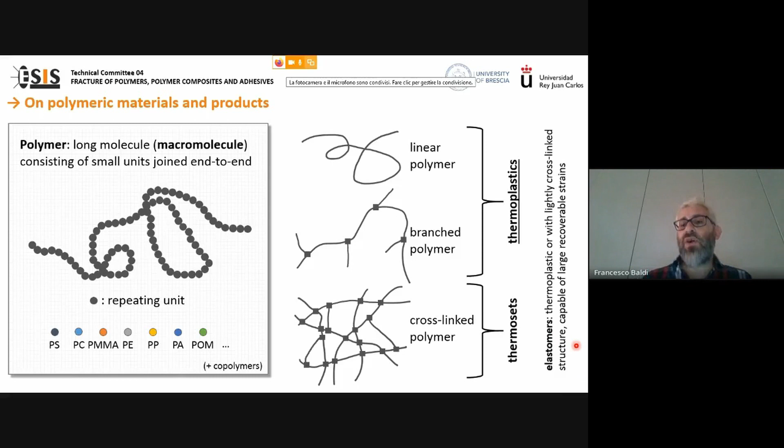Whereas thermoplastics consist of linear polymers and branched chains. I've put apart elastomers, which can be either thermoplastic or with a lightly cross-linked structure, and are capable of larger recoverable strain. I will focus attention on thermoplastic polymers.

The group of thermoplastics is larger than the group of thermosets, and thermoplastics are more common. If I have a thermoplastic polymer, I can bring it to process temperature, and at this temperature the thermoplastic is in a liquid state.

Thank you. Now, the thermoplastic polymer goes to process temperature, passes into a liquid state, and in that liquid state it can be formed in order to obtain, after cooling, a part or a product.

If I consider the structure of that polymer in the solid state, I can find either a semicrystalline structure or an amorphous structure. In a semicrystalline structure, macromolecules have the possibility to form regular patterns, regions with very high order, whereas in the amorphous structure, macromolecules are not able to form these regular pattern regions.

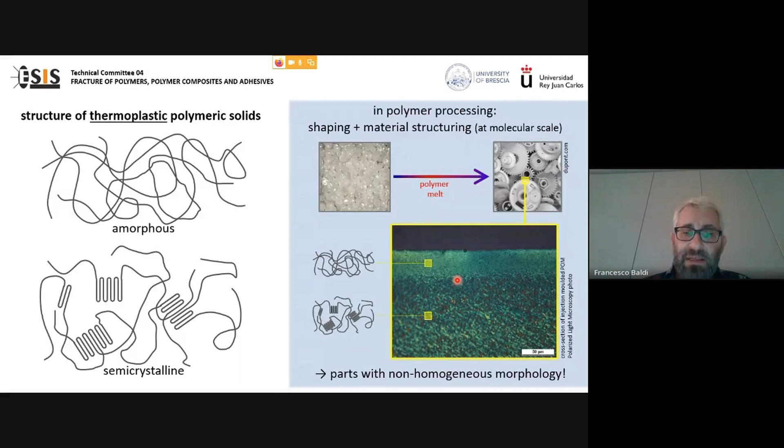Now, if I consider polymer processing, it involves shaping, but shaping is intrinsically associated with material structuring at a macromolecular scale. If we consider a part obtained, for example, in a semi-crystalline polymer, this part presents a non-homogeneous morphology, where regions characterized by a semi-crystalline structure are together with regions characterized by an amorphous structure, and this can have an effect on the performance of the product.

Nowadays, more and more often, thermoplastics are used as the basis for compounds, and for structural applications the compounds consist of polymers filled with rigid particles or short fibers.

If I consider processing of compounds, shaping is associated with material structuring, but this structuring does not occur only at a macromolecular level, but also at a larger scale, resulting in specific distribution and orientation of particles, which adds another degree of complexity to our structure.

If I look at this image on the left, where we can observe some glass fibers embedded into a polymer matrix, I may wonder: what about the continuum assumption that is at the basis of continuum mechanics?

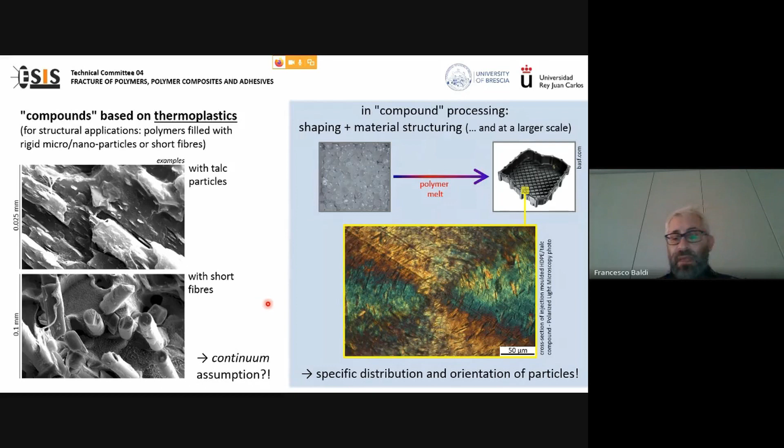Nowadays, thermoplastic polymers are used practically in all industrial sectors, from automotive to construction and building, from biomedical to electronics, from industrial design to packaging. We can find thermoplastic polymers in products with thick parts, as well as in very thin films, with thickness down to 5-10 microns, for example.

If I switch to the mechanical behavior of polymeric materials, the first thing to say is that the mechanical response of a polymeric material can change remarkably from polymer to polymer. Just to give an idea, I have reported this graph with two stress strain curves obtained from tensile tests on a polyamide 6, the green curve, and on a compound based on that polyamide 6, shown as the brown curve.

Now the difference is clear. On one side, we have the compound that exhibits a brittle behavior characterized by a strain at break around 4%. Whereas if I consider the polyamide 6, I observe an elongation at break around 60%, reached after an extended deformation region governed by specific deformation mechanisms, which activate at yielding, here in the area highlighted in yellow.

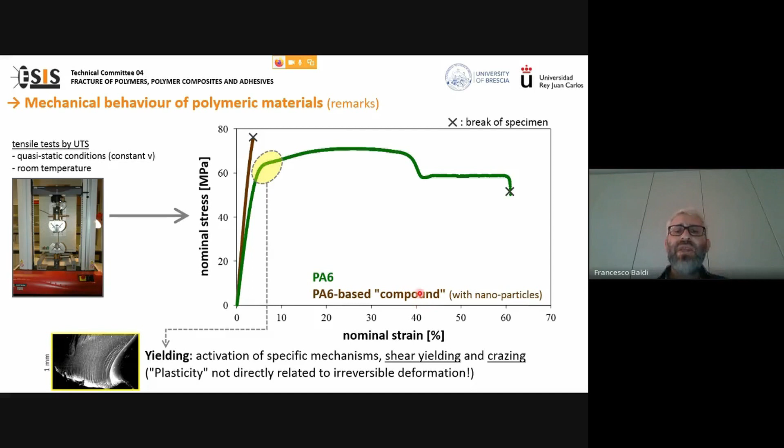or varying degrees of ductility. When we talk about polymers, we talk about viscoelasticity. Due to their macromolecular nature, polymers are viscoelastic at all temperatures. They never behave as simple elastic solids, nor as simple viscous fluids. When we say that they are viscoelastic,

for a polymer in service, we have to consider not only the level of stress and strain, but also the time for which that stress and strain will be applied to the material when in service, and also the temperature. In other words, we have to consider the history experienced by the polymeric material when in service.

In this slide, I have referred to a thermoplastic amorphous material and its relaxation modulus. In this graph, I plot the variation of the modulus, an index of material stiffness, with temperature. We can easily observe that from a modulus of plus or minus 1 gigapascal, the material goes to a modulus around 1 megapascal, typical of rubber at room temperature. This transition, where we observe this clear decrease in modulus, is the glass transition temperature.

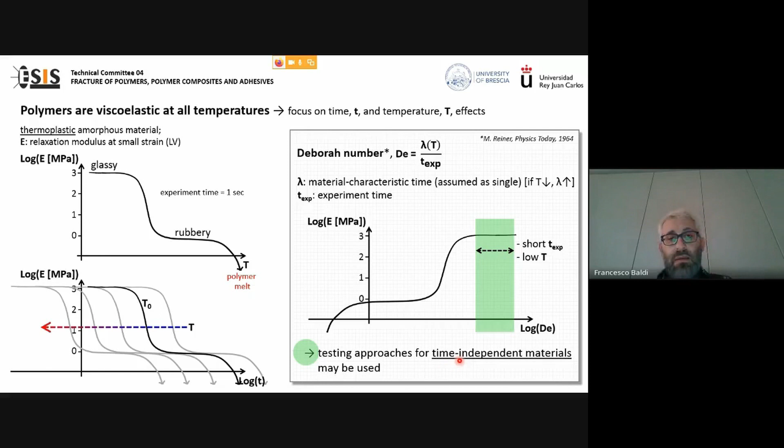Let's arrive at fracture mechanics. Concerning fracture mechanics, we know that we can count on several fracture mechanics schemes: time-independent materials in quasi-static conditions, which is valid if the non-linear deformation region is confined at the crack tip.

Within linear elastic fracture mechanics, we have the toughness parameters, the fracture parameters, which are K, the stress intensity factor, and the energy release rate. Then we have elastic plastic fracture mechanics, developed for nonlinear time-independent materials, and the fracture parameters are the crack tip opening displacement and the J integral.

More recently, fracture mechanics was extended also to viscoelastic and viscoplastic materials, and therefore to time-dependent materials. In this case, we can count on the C-star integral parameter and viscoelastic J, and it was also possible to consider dynamic effects in this context. This is, let's say, the tree of fracture mechanics.

But which scheme of fracture mechanics can I apply to polymers? The choice of the fracture mechanics scheme for polymers is based on the specific polymeric material examined, and in particular its mechanical behavior. We must not forget that thickness also plays an important role, and I have to take into account the in-service conditions, as I mentioned before, including the temperature.

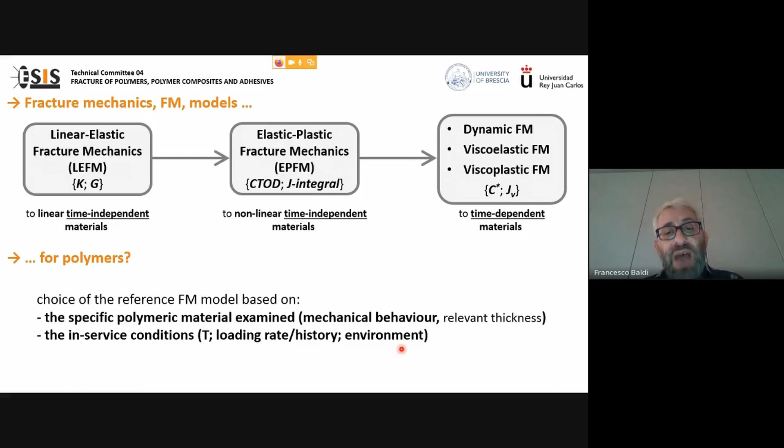The in-service condition, therefore the temperature, the loading history, and also the environment where the material will work when in service.

Now, if I consider the amorphous materials examined in two previous slides, and I consider the green region here at high levels of Deborah number, in this region I might try to apply the linear elastic fracture mechanics and the elastic plastic fracture mechanics approaches developed for time-independent materials. Therefore, the fracture parameters developed within these approaches might be suitable.

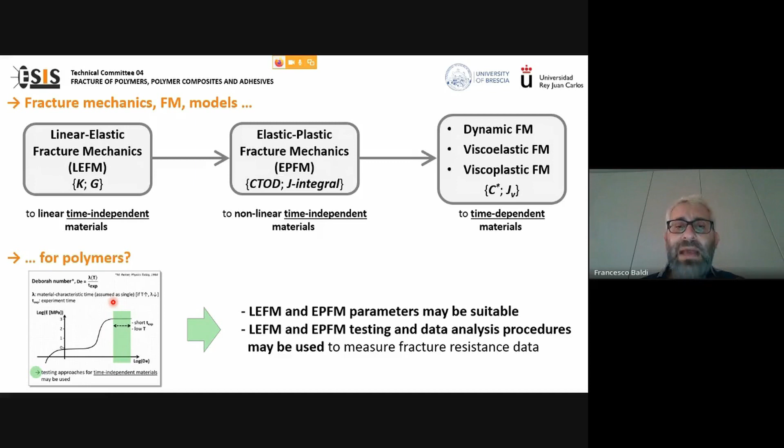In this graph here on the left, I refer to an amorphous polymer simply because it is simpler to describe, but similar considerations may apply also to a semicrystalline polymer.

Just to give you an example, in this slide I have reported some fracture toughness data obtained in mode 1, the fracture opening mode, for two polymers according to the linear elastic fracture mechanics and the elastic plastic fracture mechanics scheme. In this box on the left, we can read data of K1C and G1C.

C means that it's at fracture initiation, for a polyamide 6,6 and for a compound polyamide 6,6 with 50% of glass fibers. We can read that for the polyamide 6,6 I have a value of K1C that is around 3 megapascal per square root of meter, whereas for the compound, 8.6.

But the number is not important in this context. What is important is that I succeeded in the application of linear elastic fracture mechanics developed for time-independent materials.

Instead, here in the box on the right, I have reported a JR curve, a resistance curve, in which the values of J are plotted as a function of the crack advancement delta A. A value of J at fracture initiation of 4.3 was determined, and this curve refers to a rubber toughened polybutylene terephthalate.

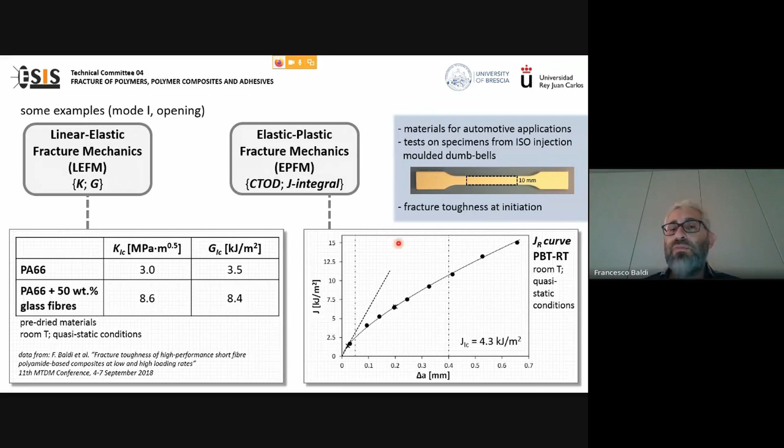Of course, I have to take into account always the time. They are viscoelastic, and I cannot forget this fact.

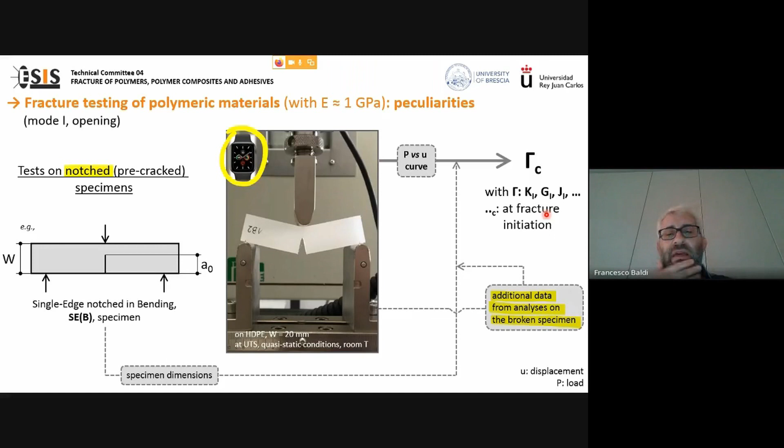From this test, I obtain the loading curves, and by using specific dimensions of the specimens and additional data determined from analysis on the broken specimen, I can determine the values of the fracture toughness parameters, K1 or J1, depending on the method I'm using, at fracture initiation.

So, concerning notching, in a polymer, the notch can be introduced either via a contact technique or a contactless technique. The important thing is that the notch has a very sharp tip, and of course the region in front of the tip is defect-free, in the sense that no mechanical or thermal damage has occurred.

Now, if you look at these photos of notches taken on non-tested specimens, we can observe that this picture on the left refers to a high-density polyethylene. In this picture, I have no damage - I cannot see any damage in front of the tip of the notch. Whereas in the other two photos, which refer to an epoxy resin and to a styrene acrylonitrile polymer, I can observe some damage of the crack tip.

Here on the right, for example, there is evident plastic deformation that was introduced during notching. We have to avoid this situation.

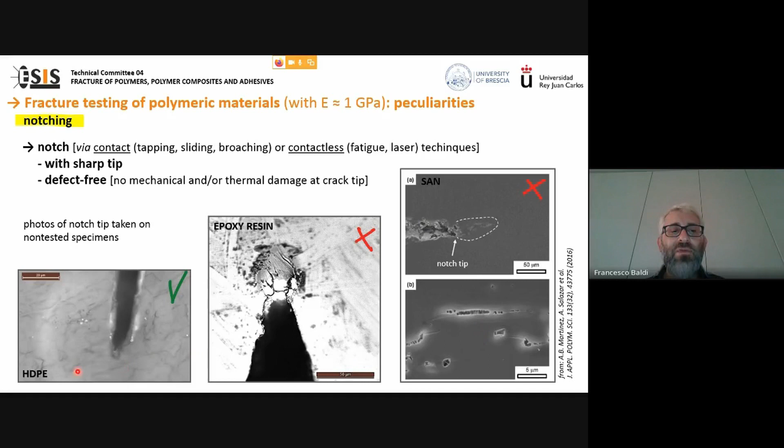Sharp notch, yes, but with the material in front of the notch without any sign of damage. Of course, I have to consider time matters.

In particular, when we apply, as will be described by Alicia in the second part of this lecture, the linear elastic fracture mechanics and the elastic plastic fracture mechanics, I need to refer to yield stress data. In choosing the yield stress data, I have to consider the stress experienced during the test. Therefore, I have to refer to the time to fracture in order to choose a value of yield stress determined with a time to yielding which is quite similar to the time to fracture.

Similar consideration applies when I have to perform energy correction tests, for example for specimen indentation, which is quite important when dealing with plastic polymers. I have to refer to the time to fracture in order to obtain energy data which might be used alongside data obtained in fracture tests.

Another thing I would like to point out is that in a stable crack propagation process, typical of polymers, the crack advancement is different from what is observed in metals. With metals, during a stable crack propagation process, I can determine the crack length indirectly by measuring the unloading compliance. With polymers, this is not possible, since the polymeric response depends on time and history, so the unloading curve and the reloading curve are not superimposed.

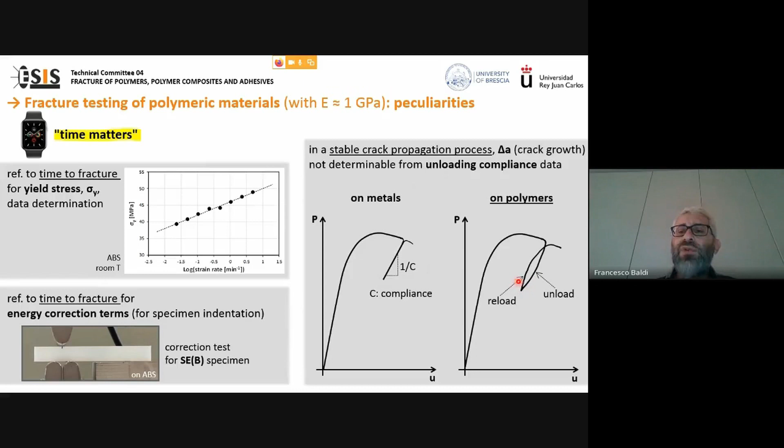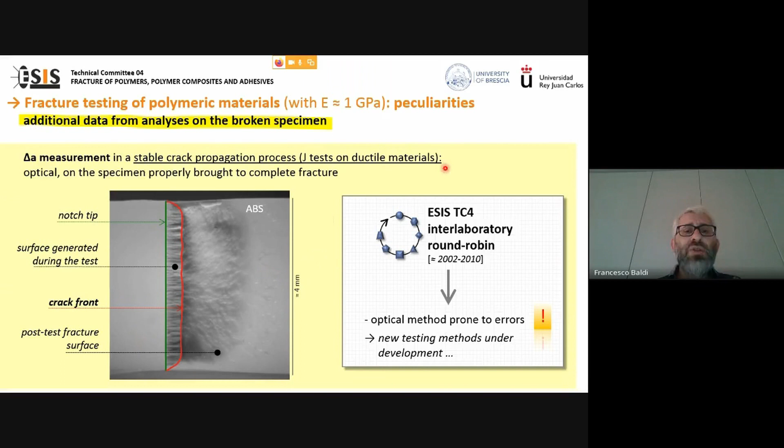Another problem we face with polymers is that measurement of crack advancement in stable crack propagation tests, which is optical and made on specimens brought to complete fracture, is not easy. The crack front, which divides the fracture area produced during the test from the remaining area obtained during complete breakage of the specimen, cannot be easily identified. In fact, some techniques not based on crack advancement measurement are under consideration in our ESIS TC4 committee.

Another aspect I would like to remark on concerns specimen thickness. Of course, also with polymers, we have the transition from plane stress to plane strain at the crack tip, with plane strain fracture toughness being the size-independent material property.

Just to underline the fact that in polymers, if we compare the behavior of a given material characterized by very low thickness with the behavior of the same material in a part characterized by very high thickness, we must properly consider the structure of the materials in the two different products. On one hand, a product with very low thickness, and on the other, a very thick specimen, different structures, which adds another degree of complexity to the analysis of specimen thickness effects on the fracture response of polymeric material.

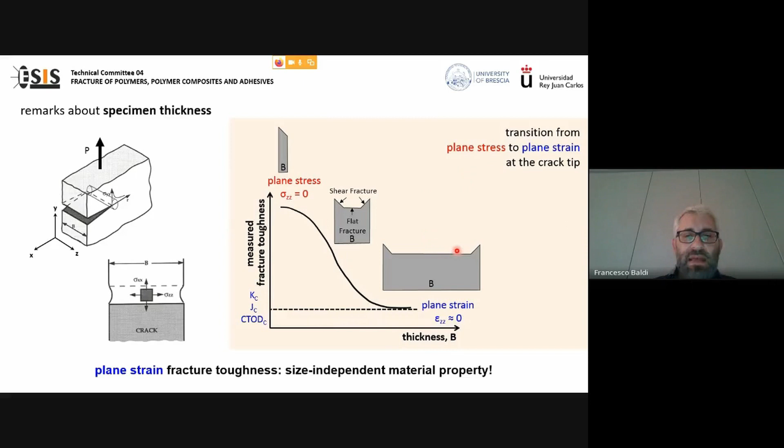Now I have finished my first part, and I invite Alicia to continue. Thank you for your attention.

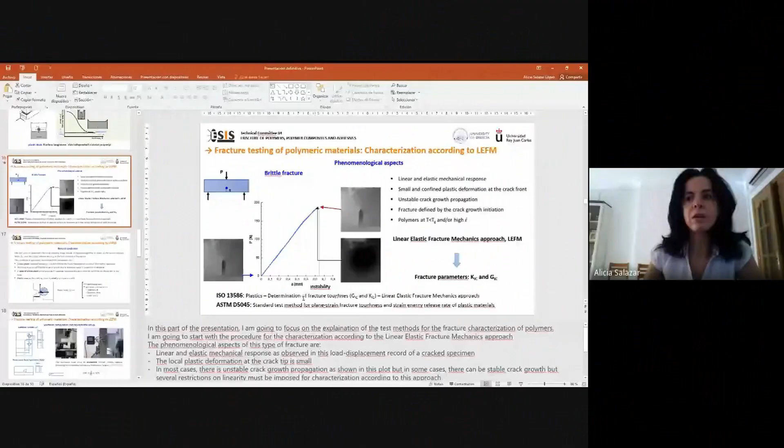Okay, thank you. In this part of the presentation, I'm going to focus on the explanation of the test methods for the fracture characterization of polymers, and I'm going to start with the procedure for characterization according to the linear elastic fracture mechanics approach.

The phenomenological aspects of this type of fracture are linear and elastic mechanical response, as observed in this load-displacement record of a cracked specimen. I'm sorry, I'm going to use the laser pointer. The second aspect is that the local deformation at the crack tip is very small.

In most cases, there is unstable crack growth propagation, as shown in this plot. But in some cases, there can be stable crack growth, though several restrictions on linearity must be imposed for characterization according to this approach.

Fracture is defined by the crack growth initiation, and in polymers this behavior can occur at temperatures lower than the glass transition temperature and/or at high strain rates. The fracture parameters, as already mentioned by Francesco, are the critical stress intensity factor, K1C, and the critical energy release rate, G1C. The subscript 1 corresponds to the crack opening mode.

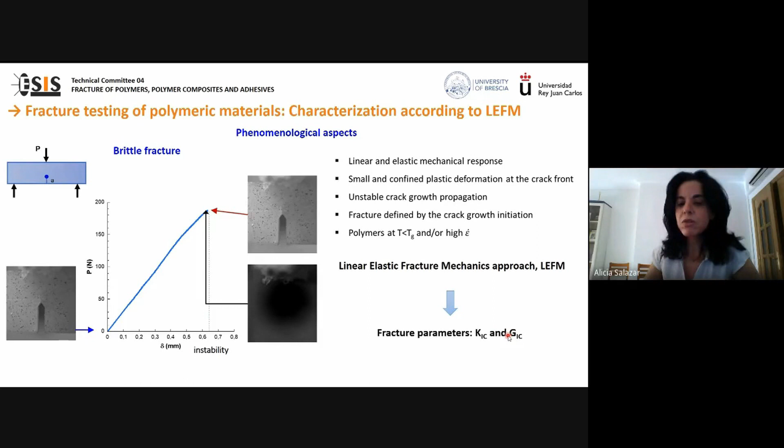The standards for determination of these two parameters are ISO 13586 and ASTM D5045. The aim of this test is to characterize the fracture toughness of plastics in terms of the critical stress intensity factor, K1C, and the critical energy release rate, G1C, at fracture initiation and at low speed. The scheme assumes linear elastic behavior of the cracked sample, as fulfilled in the load-displacement record.

The crack of the specimen must be sharp to ensure a minimum value of the fracture toughness. A state of plane strain at the crack tip is required, so the thickness must be large enough to guarantee this state.

The plastic deformation at the crack tip, shown in dark blue in this plot, must be very small in comparison with the stress intensity factor dominated zone, that is the area ahead of the crack tip, shown in light blue in this plot.

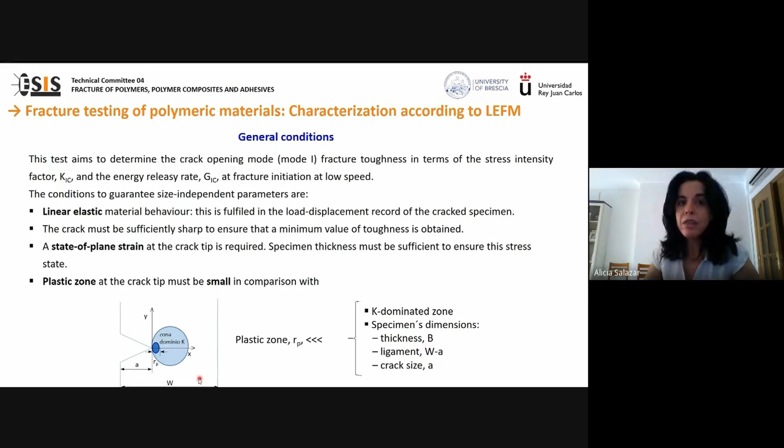Specimen dimensions such as the thickness B, the ligament defined as the width minus the crack length, and the crack length A are important.

The recommended specimen configurations are compact tension and 3-point bend geometries. The reason is that they require smaller sizes to achieve plane strain conditions, very important, than other configurations.

Normally, the material is supplied in the form of sheet, and the specimen thickness should be identical with the sheet thickness. The width, W, is normally twice the thickness, B, but in some cases, the width can range between 2 and 4 times the thickness.

This applies to the 3-point bend specimens. The two right photos show the experimental setup for the 3-point bend and the compact tension configurations.

The machine notch must be sharpened, and the total final crack length after sharpening must be between 0.45 and 0.55 times the width.

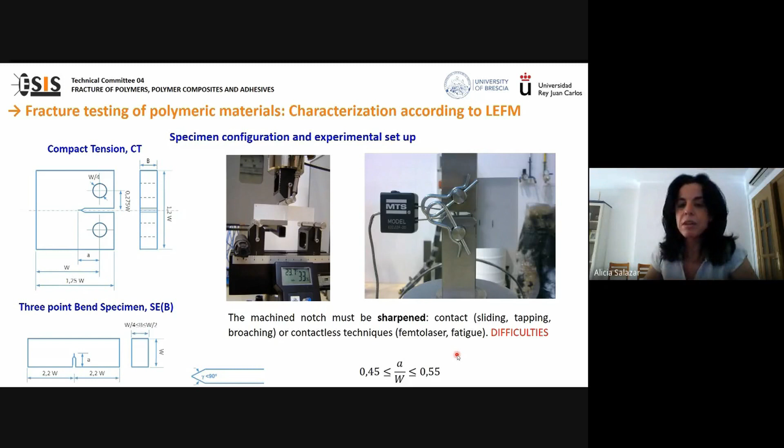Notch sharpening is a very difficult task, and more details will be given this afternoon in the talk Notching for Fracture Testing of Polymers. The test is performed at room temperature, normally at a cross-head speed of 10 millimeters per minute.

The loading time and the loading rate must be noted. The load line displacement record is obtained, as shown in this graph, and in the ideal case I want to show...

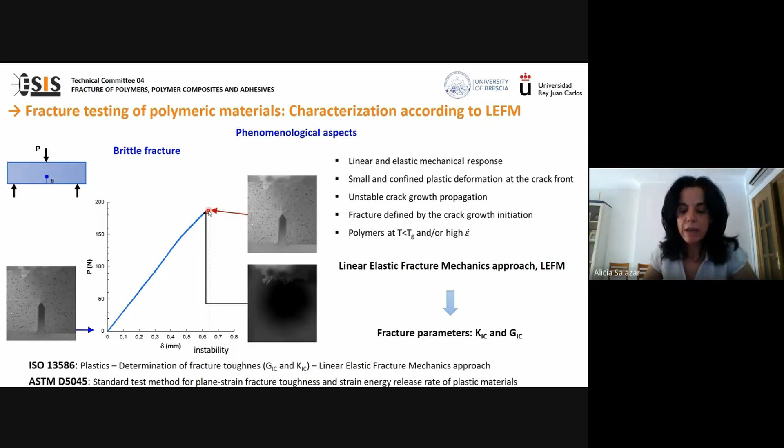...the load displacement record is linear with a sudden drop of the load at the very instant of crack growth initiation. In this case, the maximum load is used for the determination of the fracture parameters.

But in most cases, there is no linearity in the curve, and some restrictions must be imposed for the application of this approach. Firstly, I'm going to describe how to determine the critical stress intensity factor K1C.

For this, it is first necessary to calculate a conditional result, KQ, which is obtained from a load named PQ. To attain this load, the following construction on this test record is needed.

First, draw a best line to determine the initial compliance, C0, dotted line in black. Secondly, draw a second line with a compliance 5% greater, dotted line in blue.

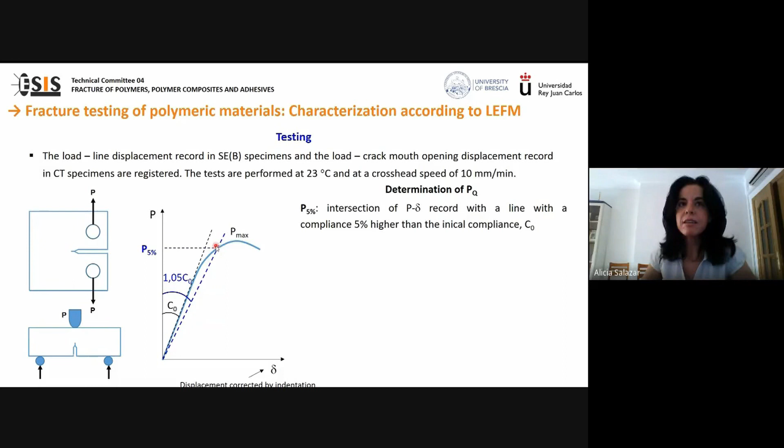The intersection of this straight line with the load curve is defined as P5%. If the maximum load over P5% is smaller than 1.1, the linearity criterion is fulfilled.

Otherwise, the test is not valid. Once the linearity criterion is satisfied, we have to define PQ.

We have two options. The first one: if the maximum load, Pmax, is higher than P5%, then P5% is equal to PQ.

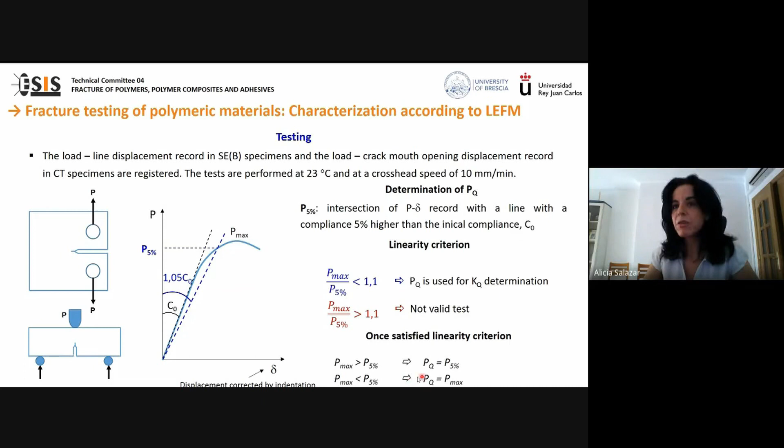On the other hand, if the maximum load is lower than P5%, then PQ is equal to the maximum load.

For the determination of the fracture parameters, we also need the value of the initial crack length, and this is obtained from the fracture surface.

Two values measured on the surface, one at the center of the specimen, and two values measured midway between the surface and the center of the specimen.

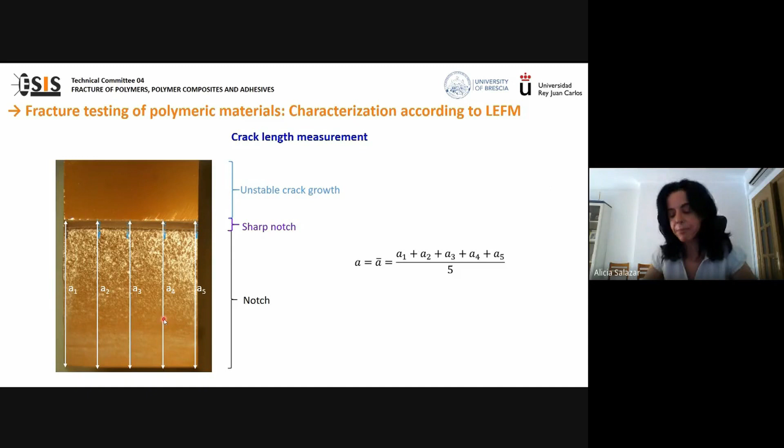Typical values for brittle solids such as epoxy resins are in the range between 0.5 and 3 megapascals square root meter.

For determination of G1C, we determine a conditional value, GQ, with this expression, where UQ is the energy computed as...

...the area under the load displacement curve up to the very same load point used for K1C determination.

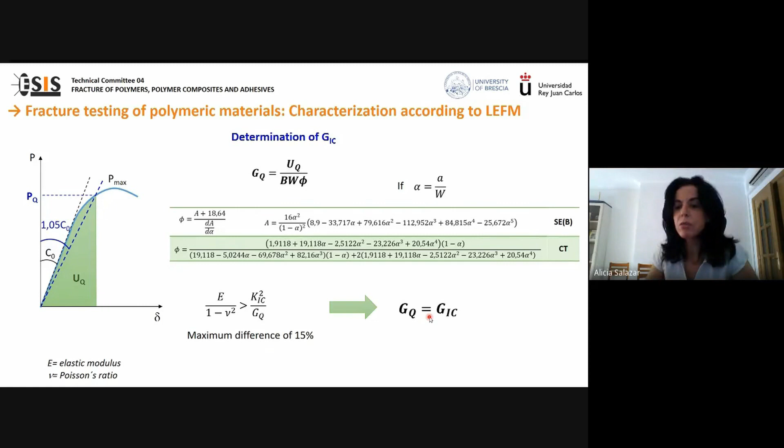Phi is a calibration factor shown in this table for the 3-point bend and compact tension specimens. The following cross check must be performed: the value of the Young's modulus E over 1 minus a square Poisson's ratio should be larger than the square K1C over GQ. The maximum difference should be 15%. If this is fulfilled, then GQ is equal to the critical energy release rate. Otherwise, the results should be inspected for possible errors.

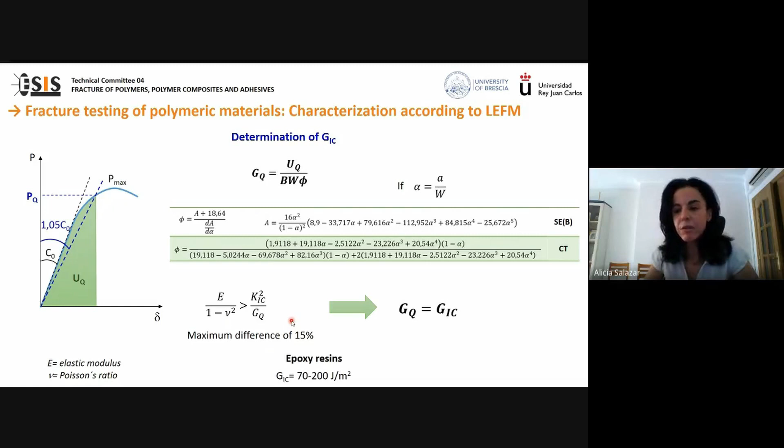The Young's modulus and the Poisson's ratio are obtained from mechanical tests such as tensile tests carried out at the very same experimental conditions as those used for the fracture characterization. Typical values of G1C for brittle polymers are in the range between 70 and 200 joules per square meter.

Finally, this type of fracture occurs in tough polymers, or in general at temperatures higher than the glass transition temperature and at a low strain rate. The fracture parameters are the J integral and the crack tip opening displacement, or CTOD. Taking into account the stable crack growth, the fracture parameters are the JR curve or the CTODR curve.

In this course, only the determination of the JR curves of polymers is described, and the standards are the ASTM D6068 and the ASTM E1820.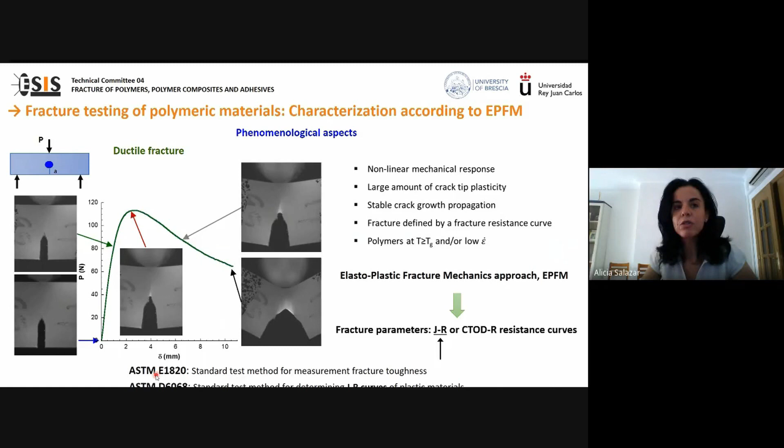In this slide, I want to describe briefly the JR curve. This curve displays the J integral values, which we'll see later how to calculate, versus the crack growth extension, delta A. Two regions are distinguished.

Region 1, in green: the crack remains stationary, but crack tip blunting occurs. The crack growth due to blunting is described by a blunting line given by this expression, where M is a constraint factor which can have values between 1 and 3, and sigma Y is the yield strength.

In region 2, in blue, real crack growth occurs, and the crack growth is described by a power law with an exponent n less than or equal to 1.

The initiation value of the J integral or fracture toughness is obtained as the minimum of the following values. J blunting, JBL, is obtained as the intersection of the blunting line with the JR curve, and J 0.2 is the J value at the crack growth extension of

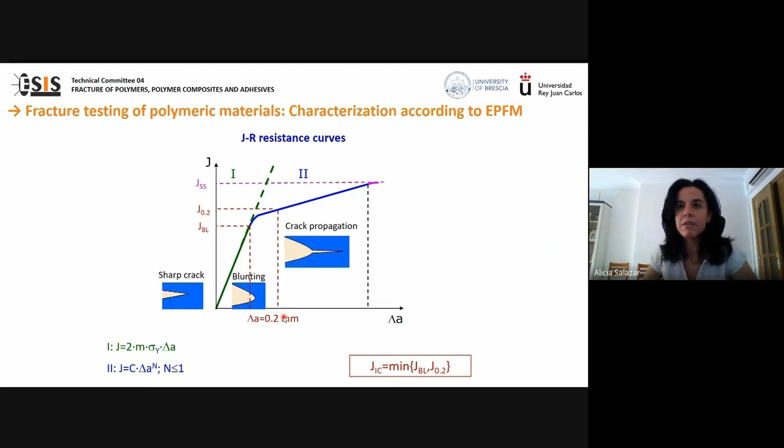0.2 millimeters. This value is completely arbitrary, but it combines two facts: one, it is small enough to be close to the crack growth initiation, and secondly, it is large enough to be measured by optical means. The aim of this test method is to determine the mode 1 J integral versus crack growth resistance curve for polymeric materials at low speed.

The conditions are: the applied load must increase steadily, and the material should not be unloaded during the test. The crack must be sharpened to ensure minimum values of fracture parameters. A state of plane strain at the crack tip is required, so the specimen thickness must be large in comparison with the plastic zone. The material temperature must remain constant during testing, and the crack extension must be measured via optical means from the fracture surface.

The most common approach for determining the JR curve of a polymer is the multiple specimen method. In this method, a set of identical specimens are loaded to different displacements and then unloaded to attain different crack extensions. Each test is used to develop a single point on the JR curve, and a minimum of 7 valid tests are needed.

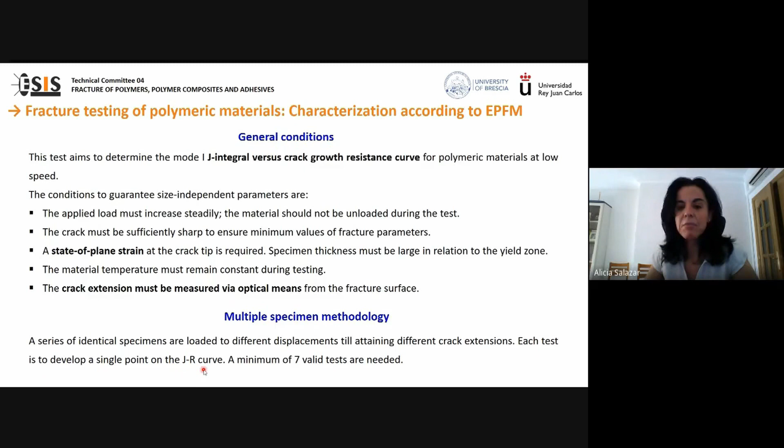The specimen configurations are the very same as those described in the linear elastic fracture mechanics approach. The machined notch must be sharpened, very important, and the length of the pre-cracked specimen should satisfy the following requirement: the initial crack length A0 to width ratio must be in the range between 0.55 and 0.65.

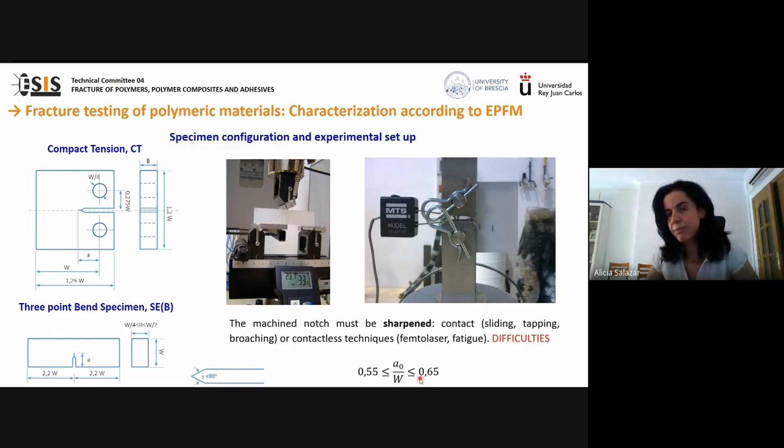The tests are normally performed at room temperature and at a crosshead speed of 1 millimeter per minute. The procedure consists of, first, loading the specimen to a selected displacement to attain a certain crack extension, and secondly, unloading the specimen, marking the crack front, and breaking the specimen to expose the fracture surface. This is a very important part indeed.

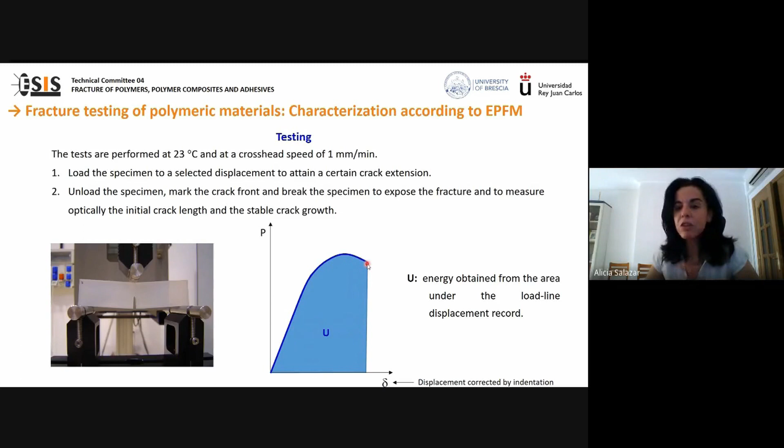The result is a load displacement record where U is the energy obtained from the area under the load displacement record, up to the displacement corresponding to the test termination.

For the determination of the JR curve, we also need the measurement of 2 crack lengths: the initial crack length, A0, which includes the machined notch and the sharp crack, and the stable crack extension, delta A.

This micrograph shows the fracture surface of a ductile polymer, an ethylene propylene block copolymer, where it is observed: the sharp crack, the stable crack extension here, the ductile fracture or plastic deformation, and then an unstable failure.

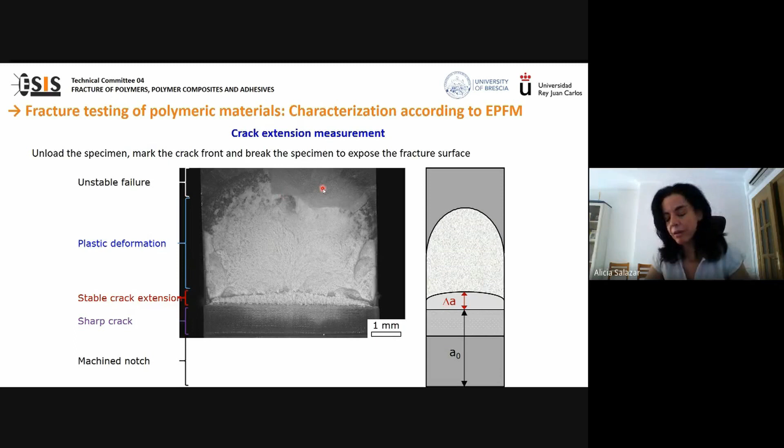For each specimen, the J integral is calculated using this relationship, where U is the energy already described, B is the thickness, W is the width, A0 is the initial crack length, and eta is a calibration factor which has a value of 2 for the 3-point bend specimen, and for the compact tension is calculated through this expression.

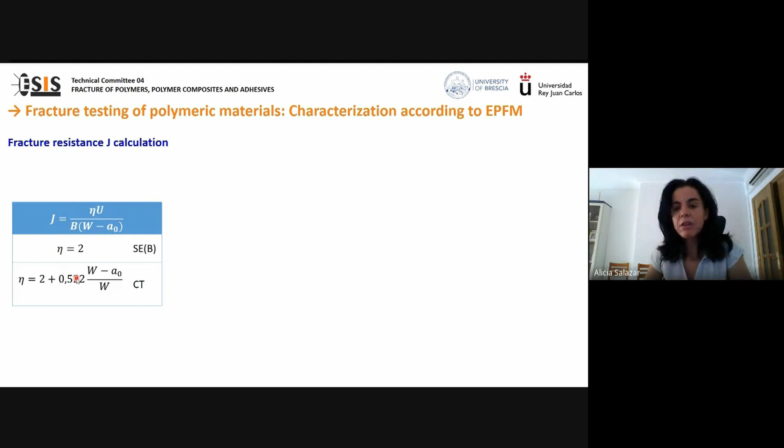For the construction of the JR curve, we use the J integral values and the crack extension delta A values to obtain a plot of the fracture resistance against the crack growth.

To ensure that the data points are evenly spaced, the interval between the 2 exclusion lines is divided into 4 equal sections. Since there is an interest in determining the fracture toughness or the fracture initiation parameter, 3 points are recommended in the first section, 2 in the second, and 1 in the third and fourth section.

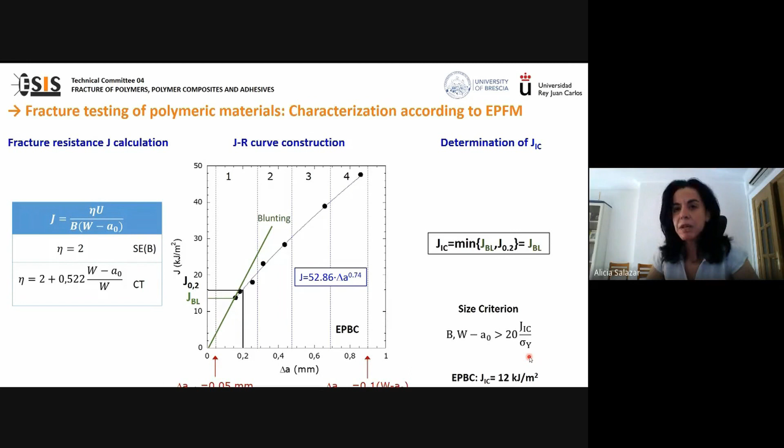I would like to finish describing briefly the test method for determining the toughness of thin plastic films, very much used in quite a big number of applications.

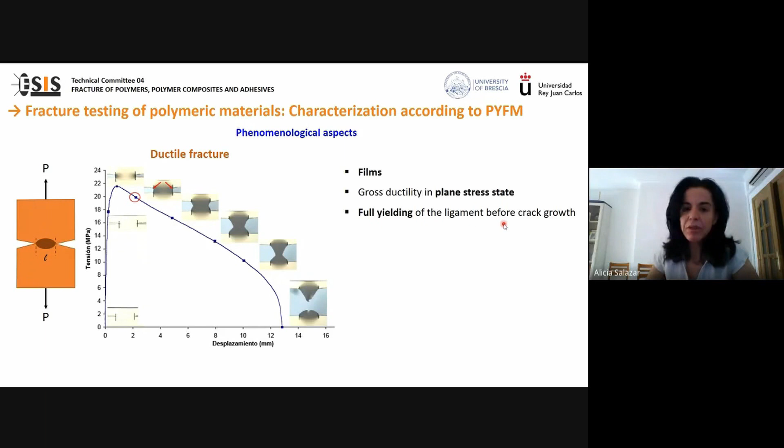The phenomenological aspects of this type of fracture are gross ductility in a plane stress state, since it's a film, full yielding of the ligament before crack growth, and the approach applied for the fracture determination is the post-yielding fracture mechanics, and the fracture parameter is the essential work of fracture, WE.

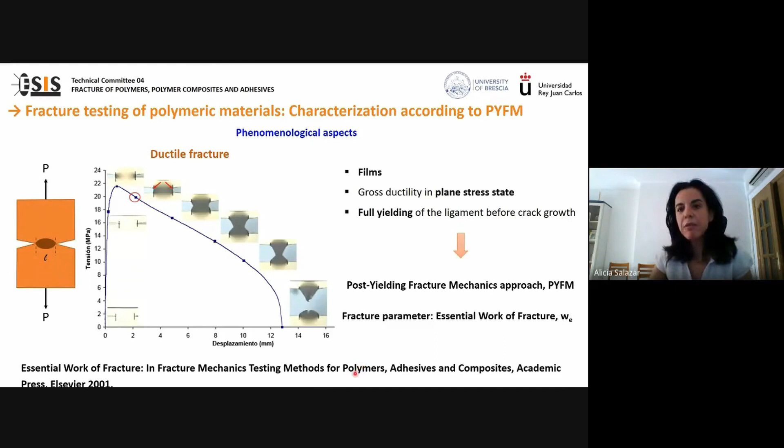The details of this test method can be found in this reference.

The essential work of fracture approach is based on the hypothesis that the total energy involved during the ductile fracture of a cracked film is divided into two terms.

The essential work of fracture, WE, that is specific to the fracture of the material in the fracture process zone, shown in dark blue in this plot, and a non-essential work of fracture, WP, which is related to gross plastic deformation occurring outside the fracture process zone, shown in light blue in this plot.

This plot shows evidently a precracked film. So the total energy absorbed can be written as follows, where L is the ligament length, T is the sheet thickness, and beta is a shape factor associated with the dimension of the plastic zone in the outer process zone.

Normalizing by the ligament cross section, we obtain the following expression, where the fracture parameters, the essential work of fracture and the non-essential work of fracture, can be obtained from the best fit linear regression of data from a series of broken specimens plotted in a diagram of specific total fracture energy versus the ligament length, as shown in the next slide.

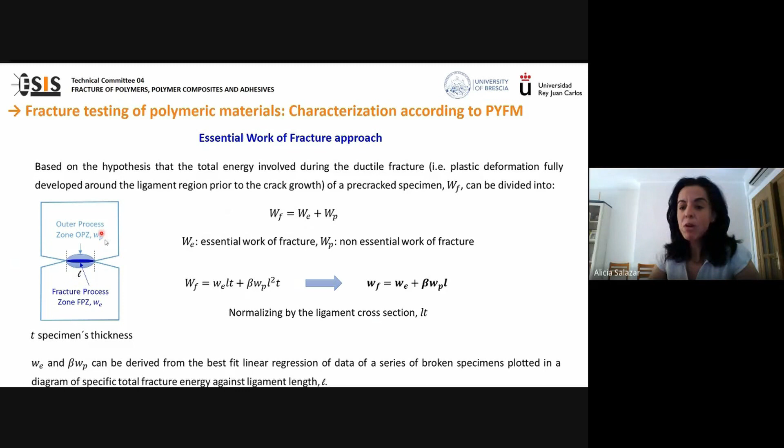I don't want to skip this: for film characterization, normally the double-edge notch tension configuration is employed, as shown in this plot. At least 20 specimens are tested with different ligament lengths.

This graph shows the load displacement records of specimens with different ligament lengths of ethylene propylene block copolymer films, 0.5 millimeters in thickness. One important feature is the self-similarity of the load displacement records of the films with different lengths. For each curve, the total energy is calculated as the area under the load displacement record, and the specific energy is obtained by dividing by the ligament cross section.

This graph shows the specific work of fracture energy versus the ligament length. The fracture parameter is obtained from linear regression, and in case of ethylene propylene block copolymers, the essential work of fracture can range between 30 and 40 kilojoules per square meter.